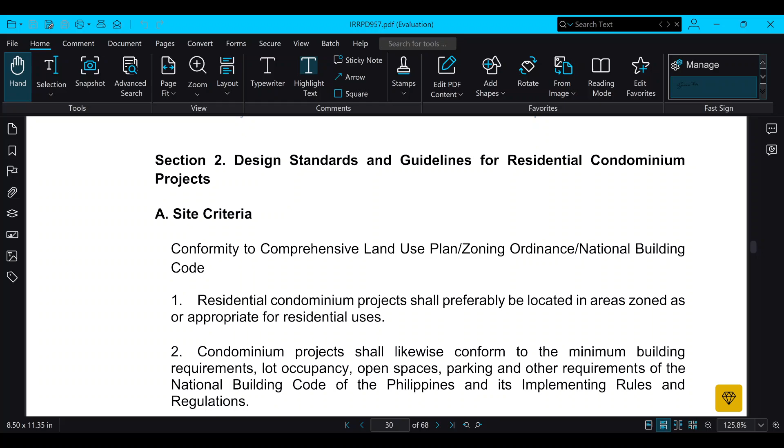A. Site Criteria. Conformity to Comprehensive Land Use Plan, Zoning Ordinance, National Building Code. Residential condominium projects shall preferably be located in areas zoned as or appropriate for residential uses. Condominium projects shall likewise conform to the minimum building requirements, lot occupancy, open spaces, parking, and other requirements of the National Building Code of the Philippines and its implementing rules and regulations.

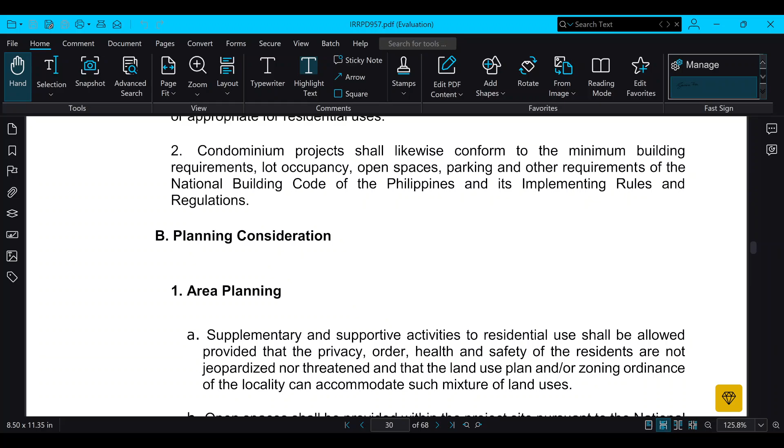B. Planning consideration. 1. Area planning. A. Supplementary and supportive activities to residential use shall be allowed provided that the privacy, order, health, and safety of the residents are not jeopardized nor threatened, and that the land use plan and/or zoning ordinance of the locality can accommodate such mixture of land uses.

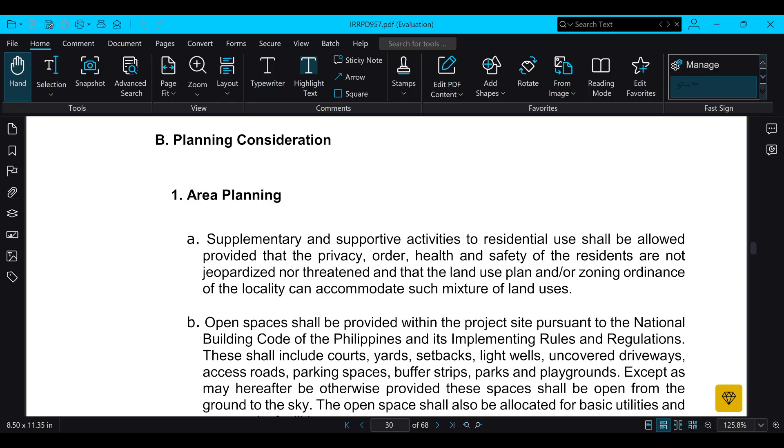B. Open spaces shall be provided within the project site pursuant to the National Building Code of the Philippines and its implementing rules and regulations. These shall include courts, yards, setbacks, light wells, uncovered driveways, access roads, parking spaces, buffer strips, parks, and playgrounds. Except as may hereafter be otherwise provided, these spaces shall be open from the ground to the sky. The open space shall also be allocated for basic utilities and community facilities or common areas.

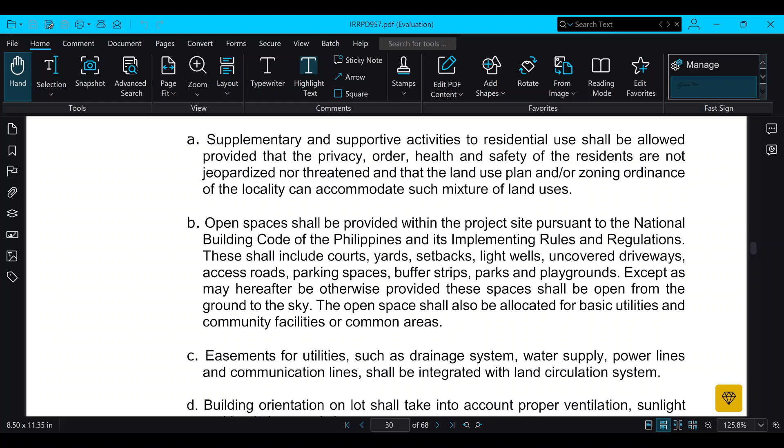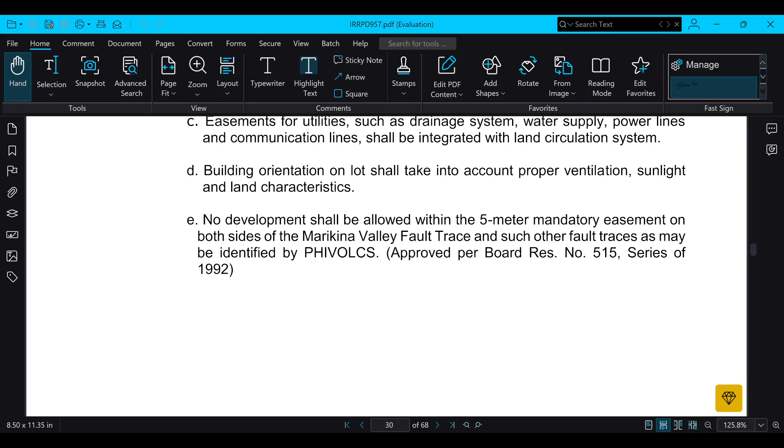C. Easements for utilities, such as drainage system, water supply, power lines, and communication lines shall be integrated with land circulation system. D. Building orientation on lot shall take into account proper ventilation, sunlight, and land characteristics. E. No development shall be allowed within the 5-meter mandatory easement on both sides of the Marikina Valley Fault Trace and such other fault traces as may be identified by PHIVOLCS. Approved per Board Resolution number 515 Series of 1992.

2. Site preservation and alteration. A. Slope. The finished grade shall have a desired slope to allow rainwater to be channeled into street drains. Where cut and fill is necessary, an appropriate grade shall be attained to prevent any depression in the area. Grading and ditching shall be executed in a manner that will prevent erosion or flooding of adjoining properties.

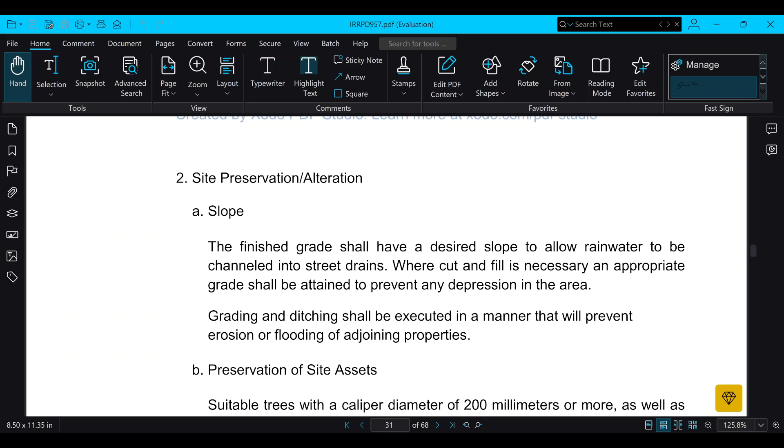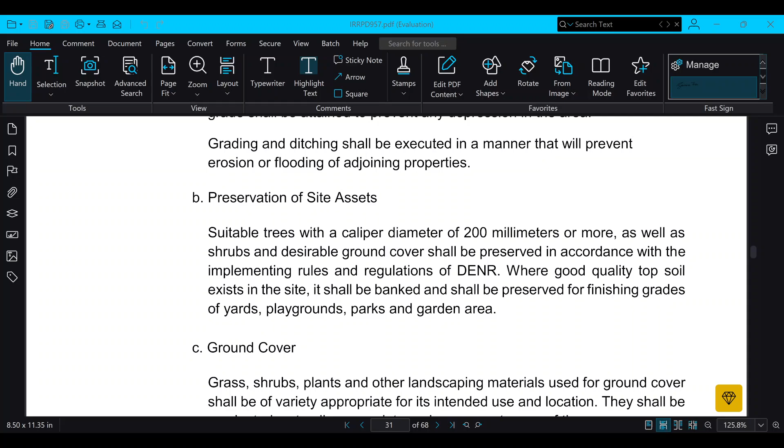B. Preservation of site assets. Suitable trees with a caliper diameter of 200 mm or more, as well as shrubs and desirable ground cover shall be preserved in accordance with the implementing rules and regulations of DENR. Where good quality topsoil exists in the site, it shall be preserved for finishing grades of yards, playgrounds, parks, and garden area.

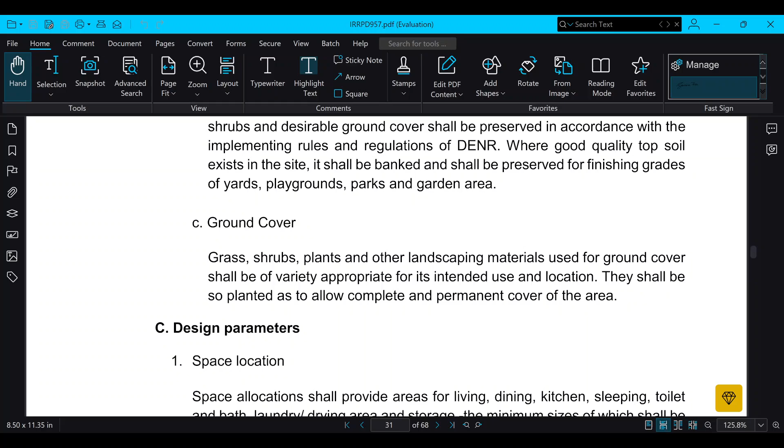C. Ground cover. Grass, shrubs, plants, and other landscaping materials used for ground cover shall be of variety appropriate for its intended use and location. They shall be so planted as to allow complete and permanent cover of the area.

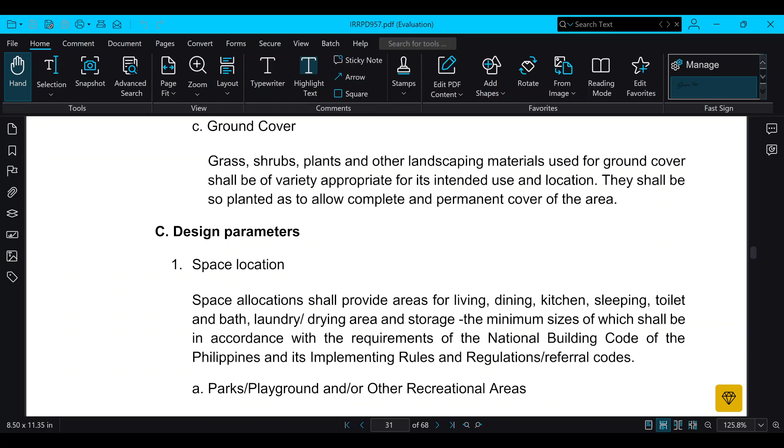C. Design parameters. 1. Space location. Space allocations shall provide areas for living, dining, kitchen, sleeping, toilet and bath, laundry drying area, and storage, the minimum sizes of which shall be in accordance with the requirements of the National Building Code of the Philippines and its implementing rules and regulations referral codes.

A. Parks, playground, and/or other recreational areas. 1. Parks, playground, exclusive of easements, access roads, driveways, parking space shall be required for projects with a gross saleable area of 1,000 square meters, or 2. Project with 10 or more condominium units, except when the condominium unit is part of a subdivision project or a park playground not more than 800 meters away.

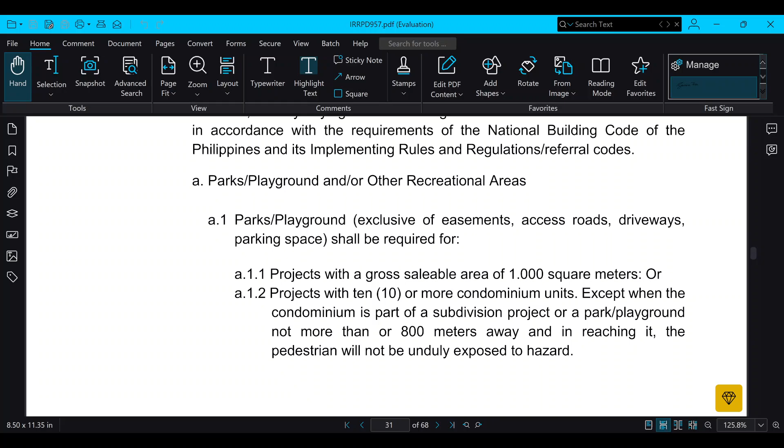And the pedestrian will not be unduly exposed to hazard. 2.

The minimum area for a single park playground shall be 50 square meters. Increments of 3 square meters for every additional family dwelling type in excess of 10 units shall be added.

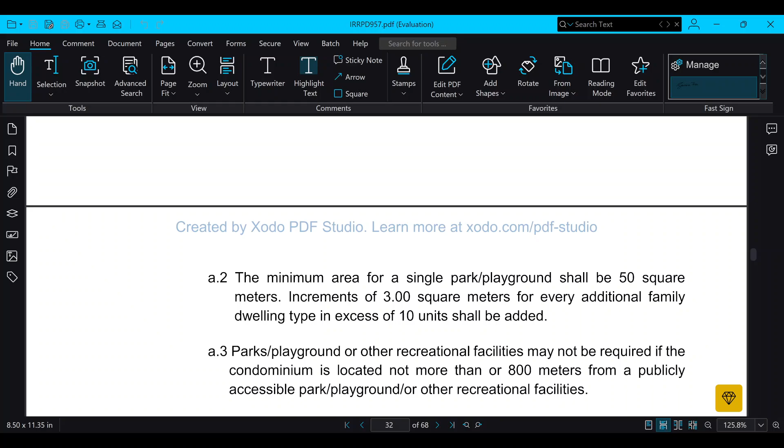Parks, playground, or other recreational facilities may not be required if the condominium is located not more than 800 meters from a publicly accessible park, playground, or other recreational facilities.

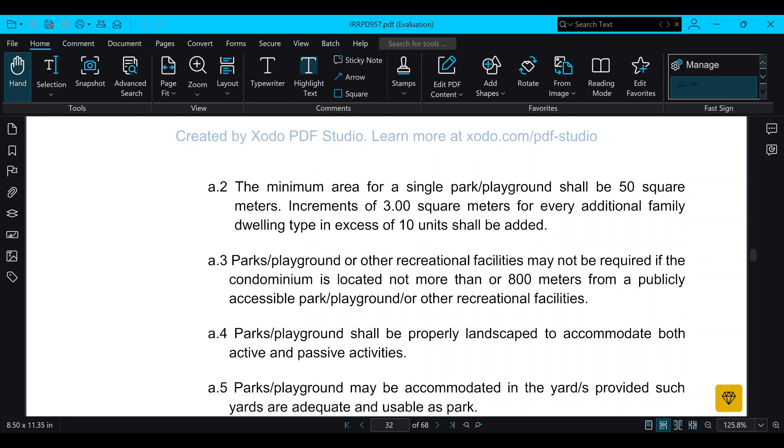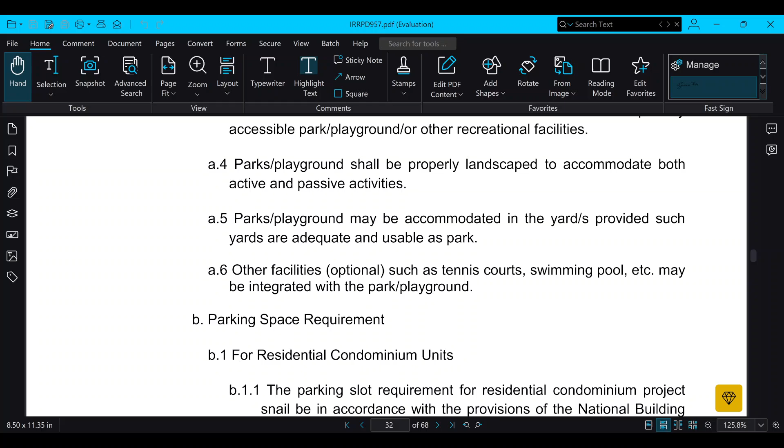Parks and playgrounds shall be properly landscaped to accommodate both active and passive activities. They may be accommodated in the yard provided such yards are adequate and usable as a park. Optional outdoor facilities, such as tennis courts, swimming pools, etc., may be integrated with the park playground.

B. Parking space requirement. 1. For residential condominium units, the parking slot requirement for residential condominium projects will be in accordance with the provisions of the National Building Code of the Philippines.

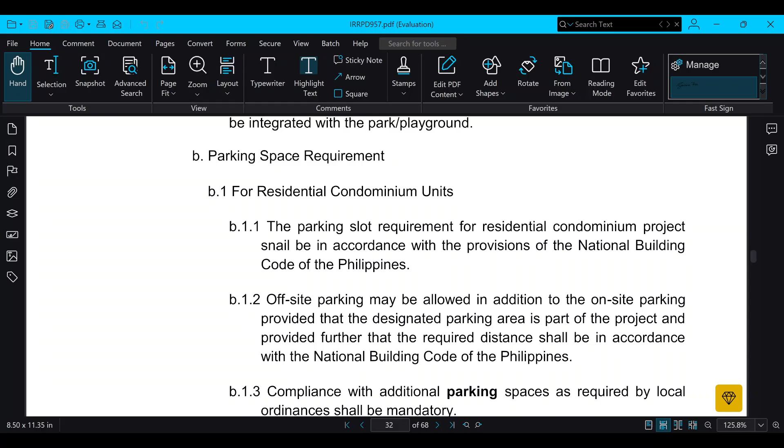Off-site parking may be allowed in addition to on-site parking, provided that the designated parking area is part of the project, and provided further that the required distance shall be in accordance with the National Building Code of the Philippines. Compliance with additional parking spaces as required by local ordinances shall be mandatory.

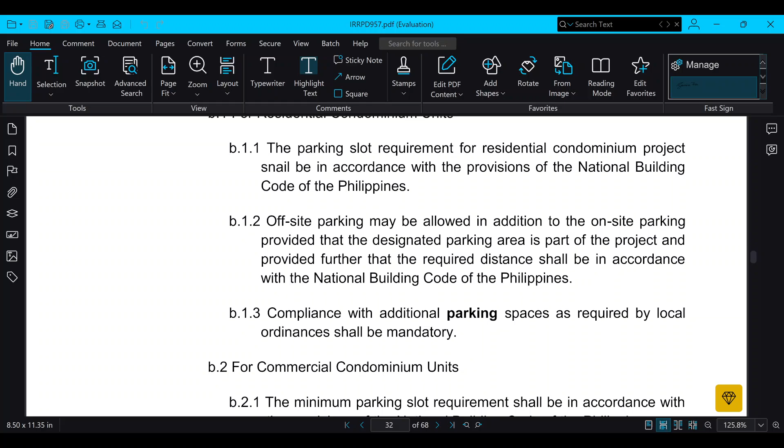For commercial condominium units, the minimum parking slot requirement shall be in accordance with the provisions of the National Building Code of the Philippines.

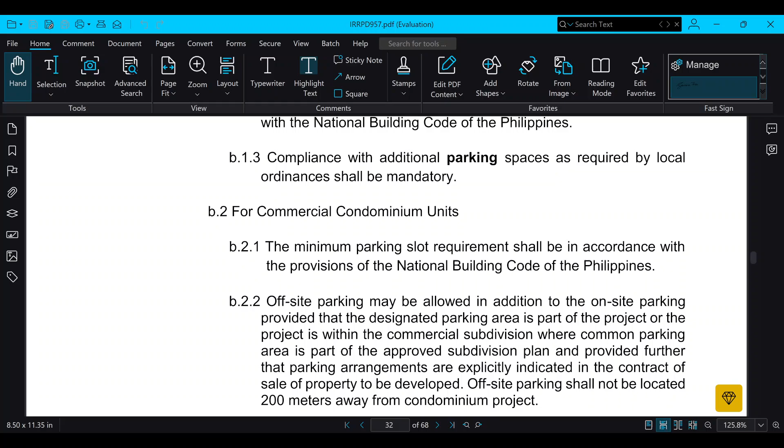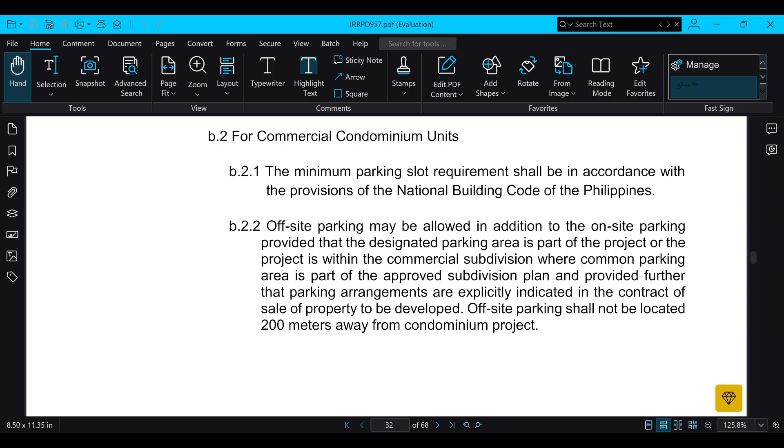Off-site parking may be allowed in addition to on-site parking, provided that the designated parking area is part of the project or the project is within the commercial subdivision where a common parking area is part of the approved subdivision plan, and provided further that parking arrangements are explicitly indicated in the contract of sale of the property to be developed. Off-site parking shall not be located 200 meters away from condominium projects.

Access roads. Roads shall serve every building, parking space, play park, playground, and service points, e.g., garbage collection points. Minimum road right-of-way shall be 8 meters.

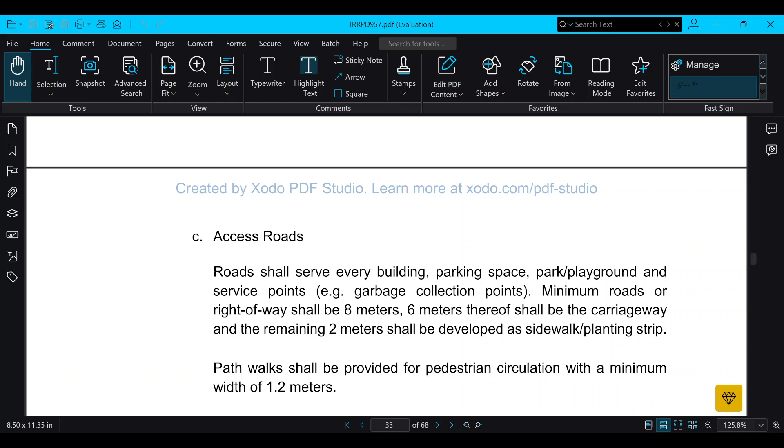6 meters thereof shall be the carriageway, and the remaining 2 meters shall be developed as a planting strip. Path walks shall be provided for pedestrian circulation with a minimum width of 1.2 meters. Construction of roads, sidewalks, and path walks shall be in accordance with the standards of residential subdivisions.

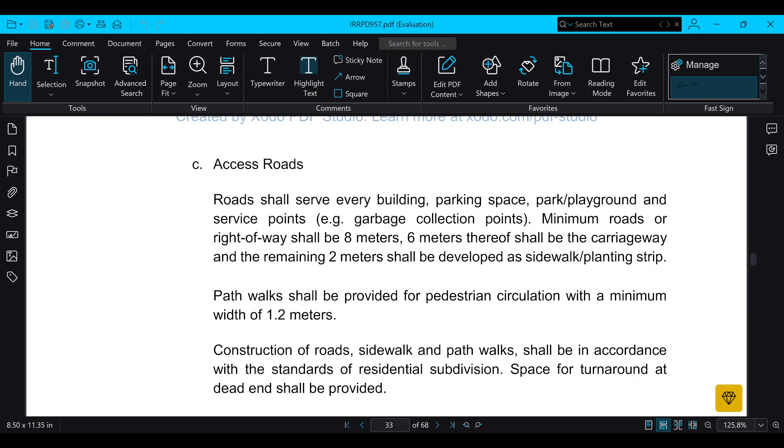Space for turnaround at dead ends shall be provided. Direct access to the property shall be provided by a public street or alley. Independent access shall be provided to a dwelling or group of dwellings on a single plot without trespassing on adjoining properties.

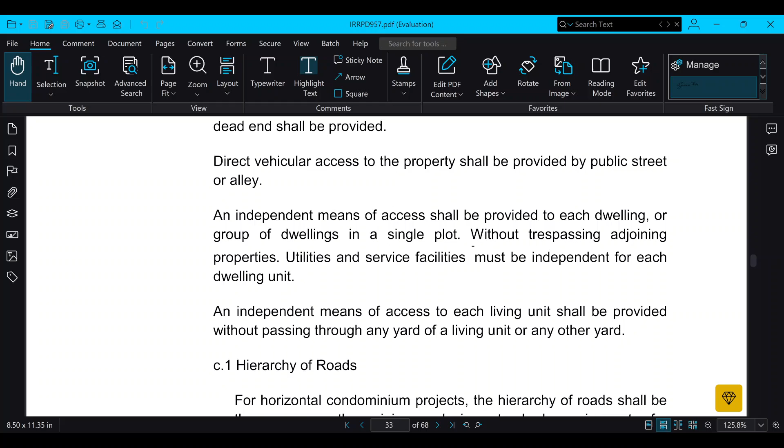Utilities and service facilities shall be independent for each dwelling unit. An independent means of access to each living unit shall be provided without passing through any yard of a living unit or any other yard.

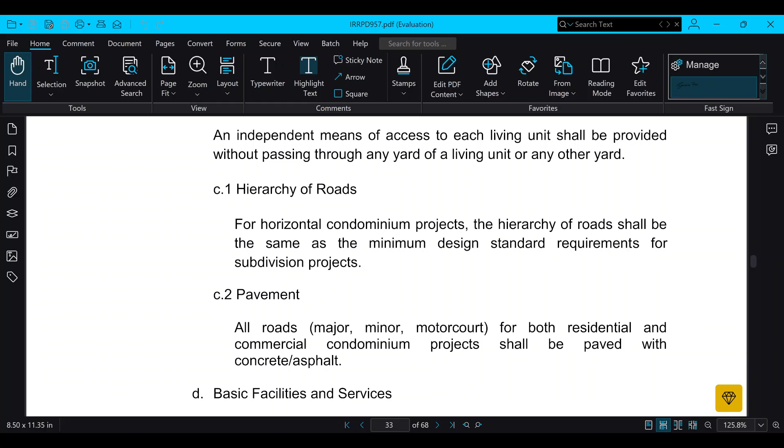Hierarchy of roads. For horizontal condominium projects, the hierarchy of roads shall be the same as the minimum design standard requirements for subdivision projects. Pavement of roads, major or minor, for both residential and commercial condominium projects, shall be paved with concrete asphalt.

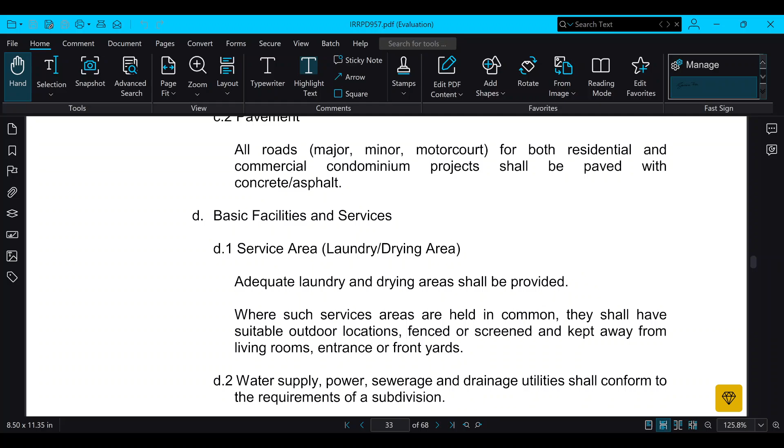D. Basic facilities and services. Service area, laundry and drying area: adequate laundry and drying areas shall be provided. Where such service areas are held in common, they shall have suitable outdoor locations, fenced or screened, and kept away from living rooms, entrances, or front yards.

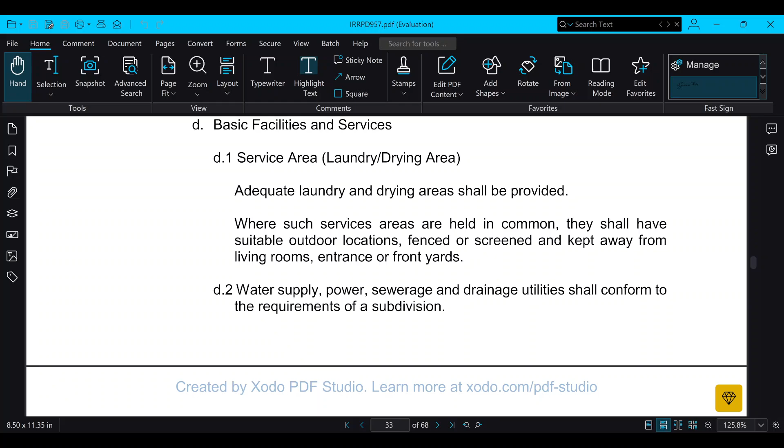Water supply, power, sewerage, and drainage utilities shall conform to the requirements of a subdivision. Reservoir water tank: for multi-story buildings, if the height of the building requires water pressure in excess of that in the main water line, a water tank shall be provided.

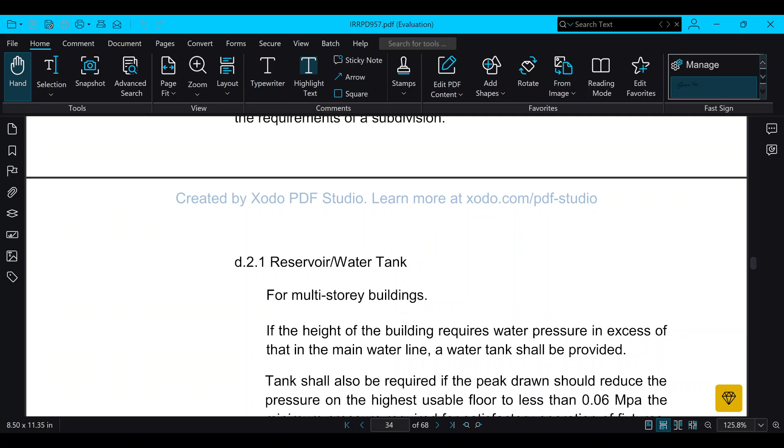Tanks shall also be required if the peak draw would reduce the pressure on the highest usable floor to less than 0.06 MPa, the minimum pressure required for satisfactory operation of fixtures, particularly those with flush valves.